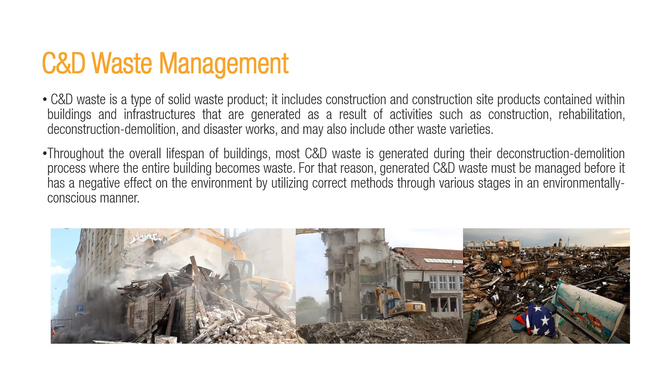Throughout the overall lifespan of the buildings, most CD waste is generated during their deconstruction-demolition process, where the entire building becomes waste. For that reason, generated CD waste must be managed before it has a negative effect on the environment, by utilizing correct methods through various stages in an environmentally conscious manner.

However, existing CD waste management legal and administrative legislation remains far from adequate regarding the process of the deconstruction and demolition of buildings. In particular, due to intensified urban renewal efforts subsequent to the enactment of the law of transformation of areas under disaster risk in May 2012, significantly larger quantities of CD waste have been generated, and Turkey's burden of managing large quantities together with existing problems of CD waste management has risen.

The lack of a comprehensive CD waste management model appropriate to the conditions prevailing in Turkey, as well as the absence of the related legislation and relative indifference of public and private enterprises regarding CD waste, has resulted in generated wastes not being assessed properly, and the bulk of such waste being destroyed at the CD waste storage yards.

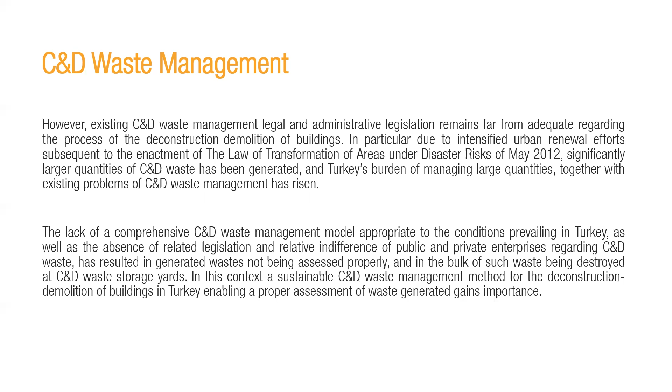In this context, as a sustainable CD waste management method for the deconstruction demolition of buildings in Turkey, enabling a proper assessment of waste generated gains importance. In this study, CD waste management in Turkey's building deconstruction demolition works and implementations of CD waste management in those works have been analyzed.

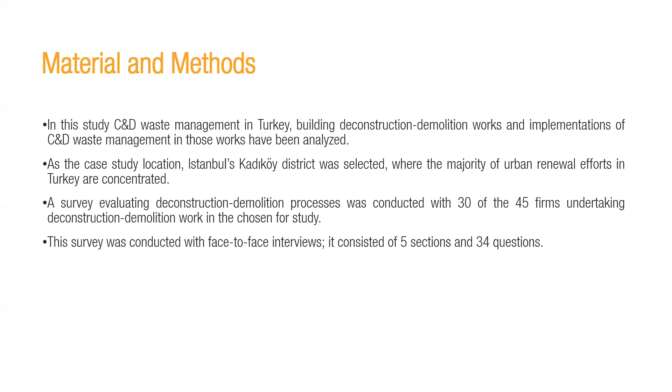As the case study location, Istanbul Kadıköy district was selected, where the majority of urban renewal efforts in Turkey are concentrated. A survey evaluating the deconstruction-demolition processes was conducted with 30 of the 45 firms undertaking the deconstruction-demolition work in the area chosen for study. This study was conducted with face-to-face interviews. It consists of 5 sections and 34 questions.

Many countries have already established regulations, conducted scientific studies, and prepared roadmaps for CD waste management. As for Turkey, despite the regulation on the control of excavation soil, construction and demolition waste in effect, which is a general law solely regulating the control of CD waste in regards to CD waste management, it remains insufficient considering prevailing conditions in Turkey.

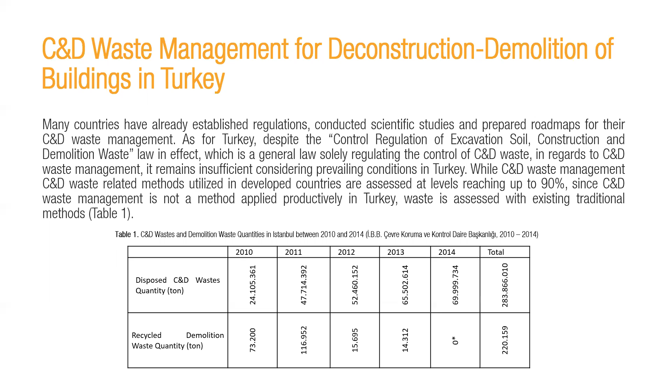While CD waste related methods utilized in developed countries are assessed at levels reaching up to 90%, since CD waste management is not a method applied productively in Turkey, waste is assessed with existing traditional methods shown in Table 1.

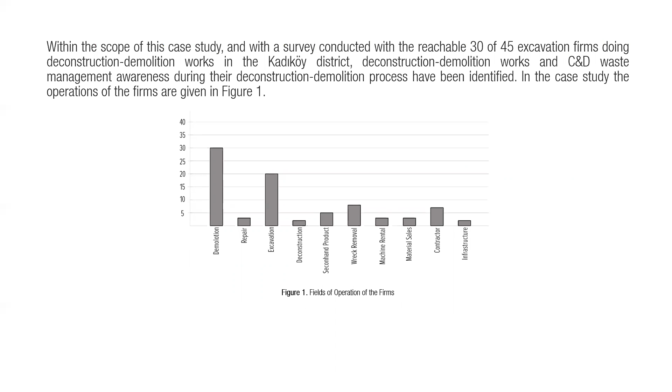Within the scope of this case study, and with a survey conducted with the reachable 30 of 45 excavation firms doing the deconstruction-demolition works in the Kadıköy district, the deconstruction-demolition works and CD waste management awareness during the deconstruction-demolition process have been identified. In the case study, the operations of the firms are given in Figure 1.

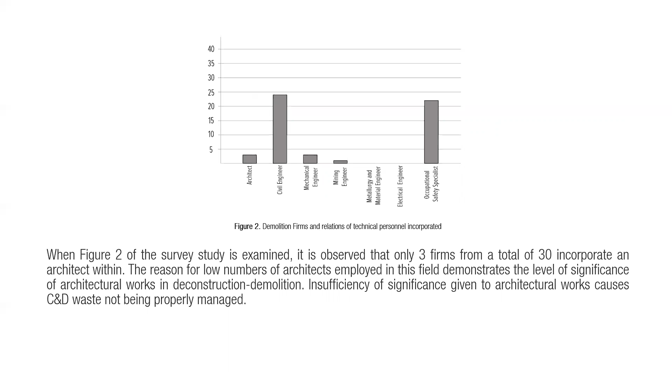When Figure 2 of the survey study is examined, it is observed that only 3 firms from a total of 30 incorporate an architect. The low number of architects employed in this field demonstrates the level of significance of architectural works in deconstruction-demolition. Insufficient significance given to the architectural works causes CD waste not to be properly managed.

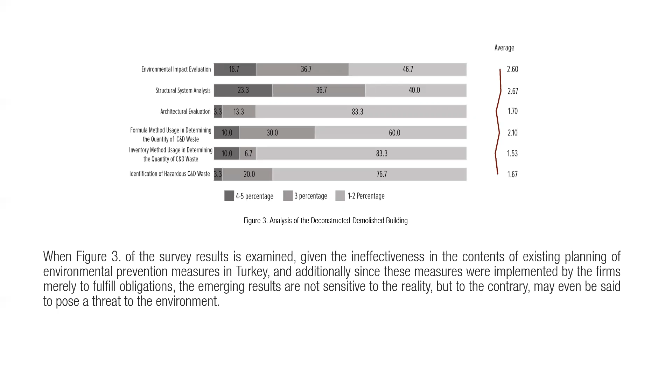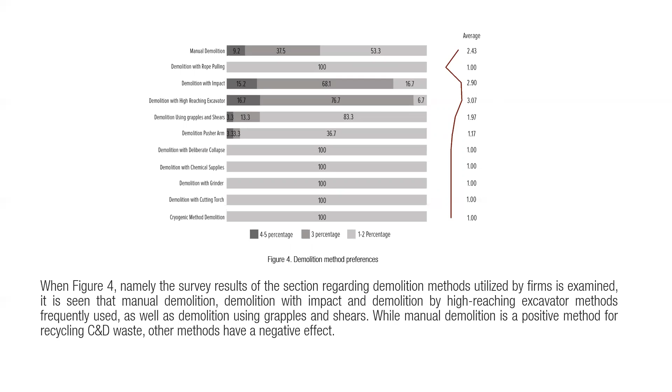When Figure 4, namely the survey results of the sections regarding demolition methods utilized by firms, is examined, it is seen that manual demolition, demolition with impact and demolition by high-reaching excavator methods are frequently used, as well as demolition using grapples and shears. While manual demolition is a positive method for recycling CD waste, other methods have a negative effect. Generally, stairs and facades are not deconstructed, while roofs and wood products are often deconstructed.

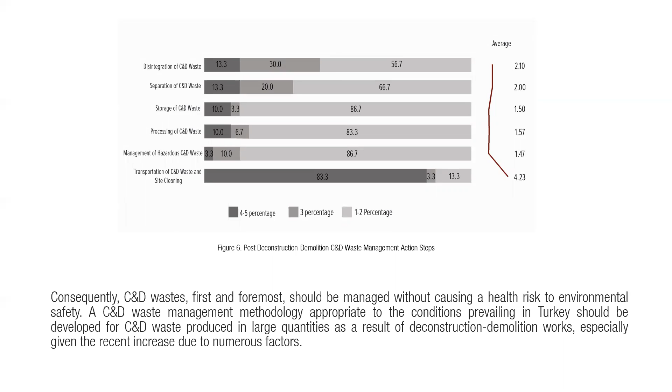Consequently, C&D wastes first and foremost should be managed without causing a health risk to environmental safety. A CD waste management methodology appropriate to the conditions prevailing in Turkey should be developed for CD waste produced in large quantities as a result of deconstruction demolition works, especially given the recent increase due to numerous factors. CD waste management during the deconstruction demolition of buildings is approached in three stages: pre-application, application, and post-deconstruction demolition stage.

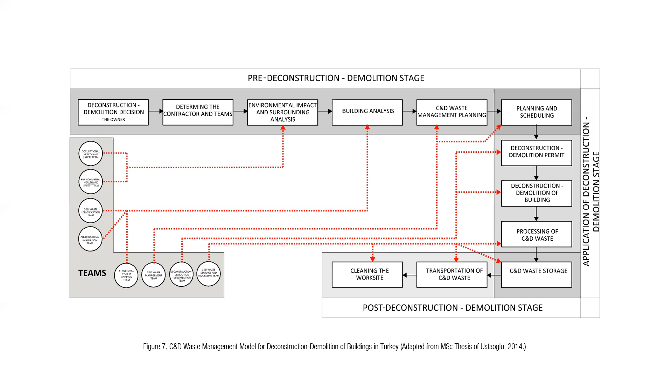Pre-deconstruction demolition stage: deconstruction demolition decision, determining the contractor and teams, environmental impact and surrounding analysis, building analysis, CD waste management planning, planning and scheduling, deconstruction demolition permit, deconstruction demolition of the building, processing CD waste, storage, transportation of CD waste, cleaning the worksite. The building analysis is structural system analysis.

In the structural system evaluation process of the building, the type of structural system, whether it was damaged or not during any previous disaster, if the structural system has any association to neighboring buildings, whether there is damage and or deformation on the columns, foundation, flooring, or beams, integrity of the system, current conditions of the walls, and structural system elements to be used in the deconstruction demolition methods should be decided and evaluated.

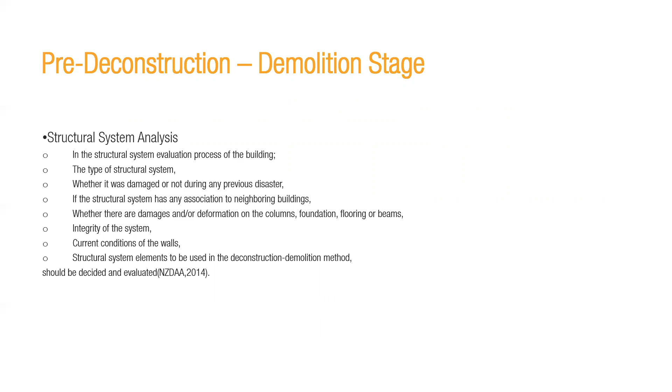Architectural evaluation: this action step should be evaluated with works such as, for buildings without construction plans, manifestation of the current situation of the building by redrawing plans from statistical surveys showing their original state. For buildings with construction plans, comparison with the current state of the building and historical identification of the change. Spatial analysis performance, determining work areas which might be risky for the workers. Specification of the building, whether it has historical or monumental value or not.

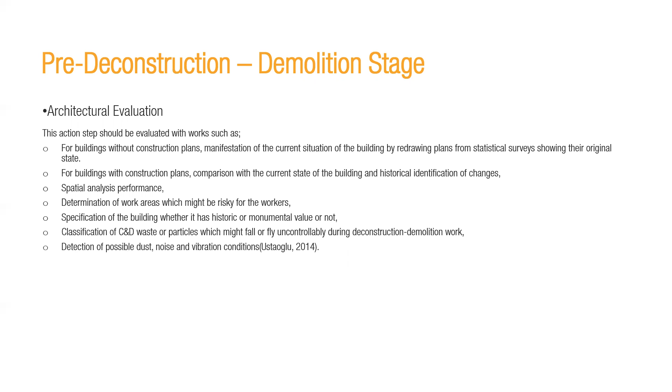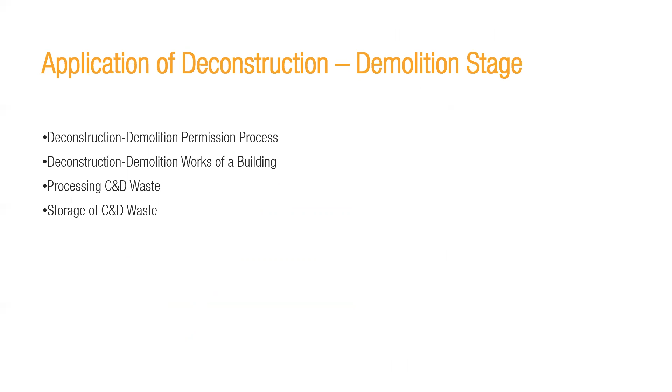Classification of CD waste particles which might fall or fly uncontrollably during the deconstruction demolition work, detection of the possible dust, noise, and vibration conditions. Source reduction, prevention, assessment methods: source reduction, prevention, reuse, recycle, disposal. Application of the deconstruction demolition stage: the deconstruction demolition permission process, the deconstruction demolition works of a building, processing CD waste, storage of CD waste.

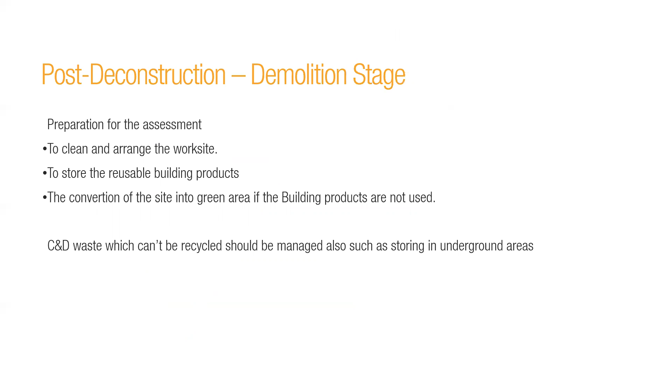Post-deconstruction demolition stage: to clean and arrange the work site, to store reusable building products, and the conversion of the site into a green area if the building products are not used.

Conclusion. It is necessary to manage CD waste in order to reduce the amount of raw materials and energy used producing new buildings and building products, to avoid the negative impact of hazardous materials used in the past, and to retain control over them without negatively impacting the environment. For the CD waste to be managed, it's also crucial to manage the process where CD waste is generated in the deconstruction demolition of buildings.

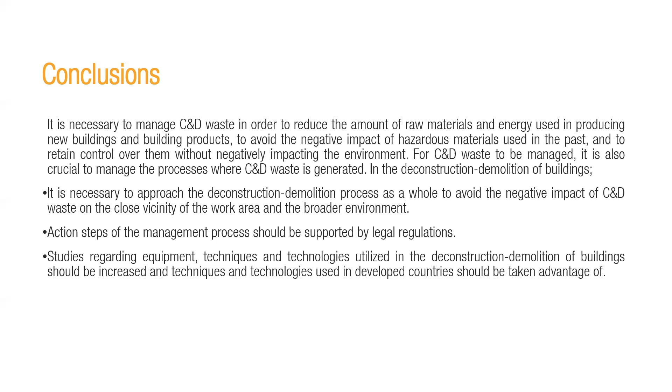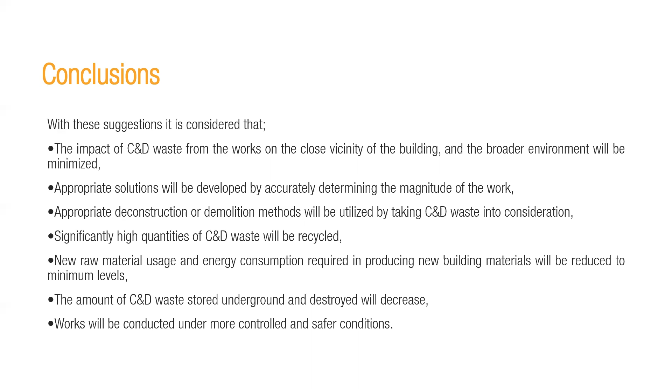With these suggestions, it is considered that the impact of the CD waste from the works on the close vicinity of the building and the broader environment will be minimized. Appropriate solutions will be developed by accurately determining the magnitude of work. Appropriate deconstruction or demolition methods will be utilized by taking CD waste into consideration. Significantly, high quantities of CD waste will be recycled. New raw materials used and energy consumption required in producing new building materials will be reduced to minimum levels. The amount of CD waste stored underground and destroyed will be decreased. Works will be conducted under more controlled and safer conditions.